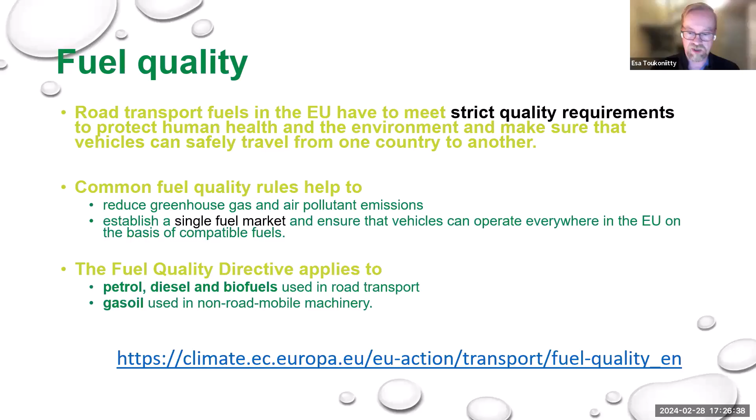If you are interested, you can take a look at this fuel quality directive. I have taken some slides which open up what the fuel quality directive specifies, but that will come later.

In this fuel quality directive, there are specifications for different fuels like petrol, diesel, and the biocomponents that have been blended into these fuels. There's a list of parameters with a set of minimum and maximum levels, and the parameter values can vary within these limits, or sometimes there is just a minimum limit, sometimes only a maximum limit, depending on the parameter.

Also, there are limits for pollutants. These are not actually in the fuel, but come from the combustion process while the engine is running, so it ends up in the exhaust gas. It's not in the fuel itself, but the origin comes from either the fuel or from engine and after-treatment system performance.

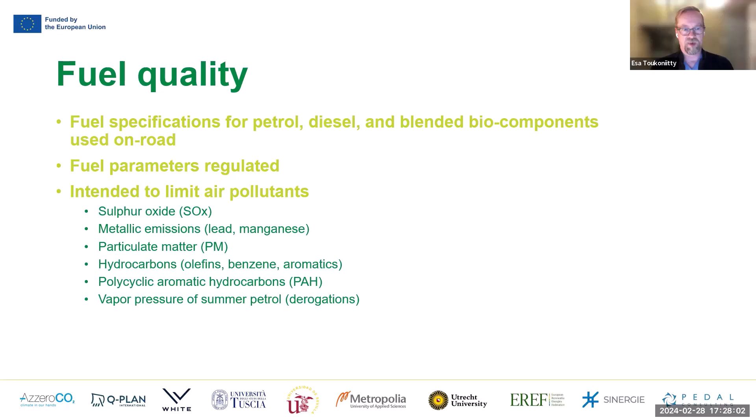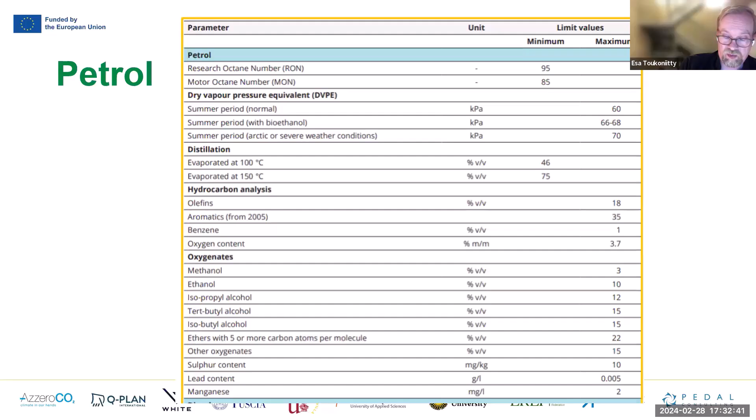I think in the aviation industry it's still being used, not in all airplanes, but at least some.

During this course, we also take a look at another biofuel which is a bit more technically advanced, the hydrogenated or HVOs - hydrotreated vegetable oils. Their performance is much better, and those can be used as such without any fossil components. But this can be added at a maximum of 7 volume% into the current fossil-based diesel that we have in today's gasolines or petrol stations.

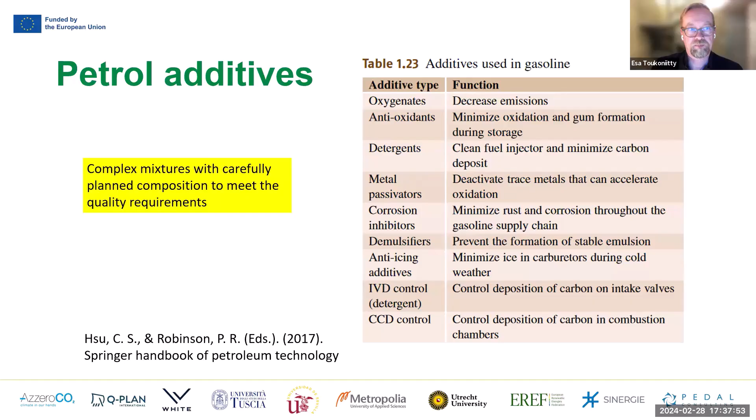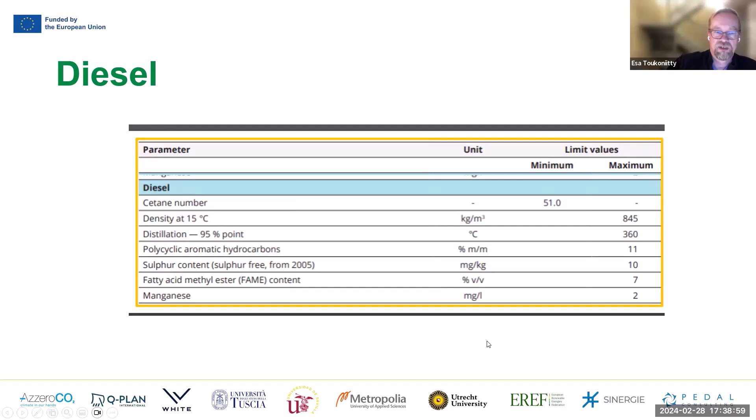There have been quite big problems with this. So therefore, if you are a sailor or if you have a diesel engine in your boat, you prefer using diesels that do not have any biocomponents blended in.

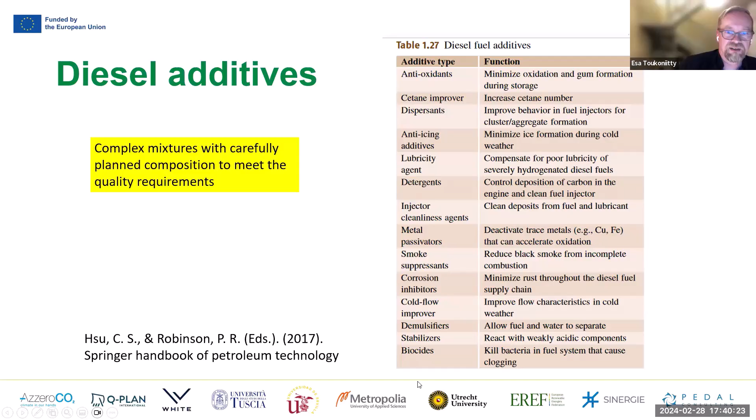Just a peculiar detail regarding this. This is the long list. There was also the EU fuel quality requirements. The fuel has to be compatible with the engine, and that's self-evident. If it's not, it will end up breaking the engine or causing problems.

That's not wanted. Also, the after-treatment units have to tolerate the fuels and the components in the fuel. This whole system is kind of interconnected - the type of fuel has been fixed and set in these standards and rules, and the engines have been designed to operate in an optimum way with these current fuels.

The after-treatment comes from the fact that emissions are controlled, and if car manufacturers want to meet the emission limits, they cannot do it by just optimizing the engine or selecting the fuel, but they also need to do after-treatment for the exhaust gases. Therefore this is kind of a marriage of three components that have to work together.

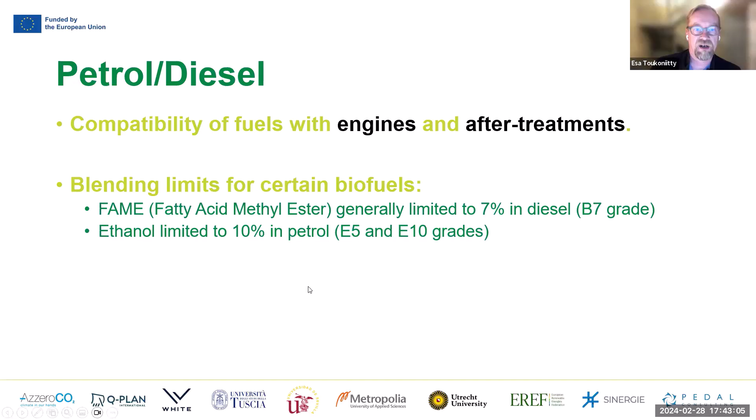FAME is used in diesel, like mentioned already multiple times, but currently bioethanol is used in petrol. At least in Finland, we sell 98 octane, which has E5, so 5% ethanol, and then we have 95 octane that contains a maximum of 10% ethanol as the biocomponent. This comes from the fuel directive and from the standards as well.

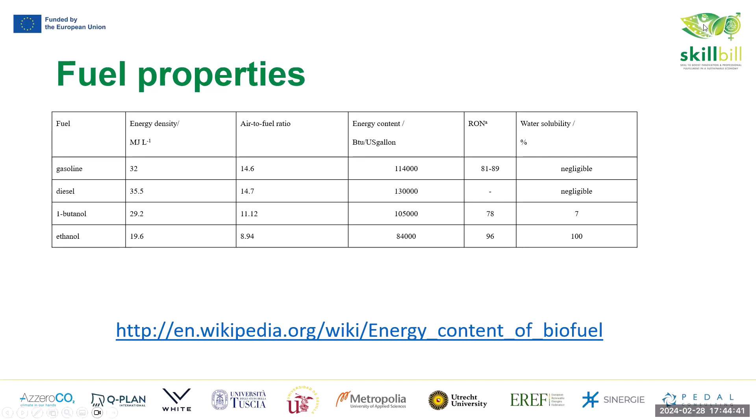So what I wanted from this table is important properties - water solubility. We know that traditional fossil-based gasoline or petrol and diesel are not water soluble. That's a good property - if you have water impurities in your fuel, those will separate as their own phase, a water phase, usually at the bottom of the fuel tank. But water will cause problems in the engine and in combustion.

When we add biocomponents like ethanol, which is an alcohol product, you can mix it in all proportions - it's completely water soluble. So it will absorb moisture from the air, and the water content will gradually rise, causing problems eventually. Butanol is a slightly longer chain alcohol than ethanol and is only slightly water soluble, but this also applies to FAME, the fatty acid methyl ester biodiesel component. It's slightly water soluble, and some stability problems and microbial growth problems come from the water solubility of that particular chemical.

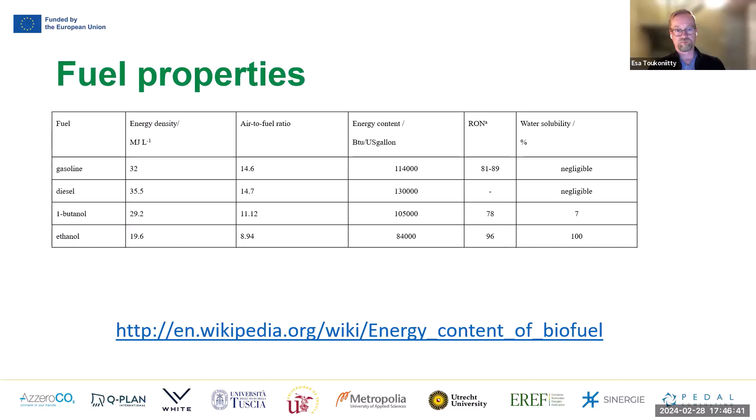I will not tell you much about these. It was just to highlight some of the things that are important, perhaps also important for the optimal performance of the engine, and are related to the fuel itself.

So for each fuel there is a certain air to fuel ratio, which is kind of the stoichiometric amount of oxygen needed to combust the fuel completely. The engine can be run with an excess of oxygen, or with too little so that there is not enough oxygen. So you can vary the amount of air compared to the fuel, and this air to fuel ratio is a measure of that.

This has particular importance for the after-treatment catalytic converter. If there is excess of oxygen, you run in oxidizing conditions. If there is a lack of oxygen, you run under reducing conditions. A few words about that soon.

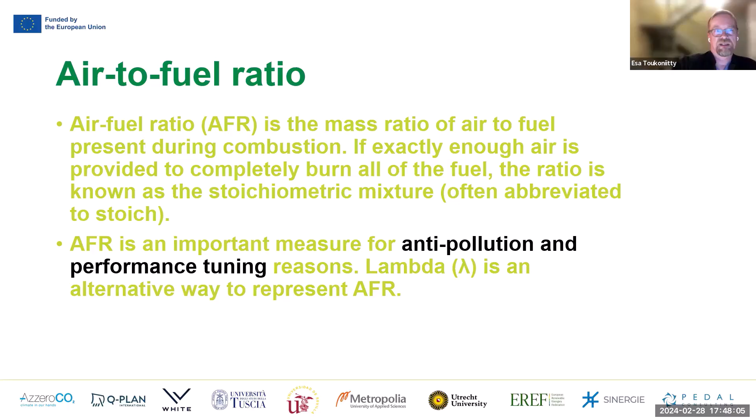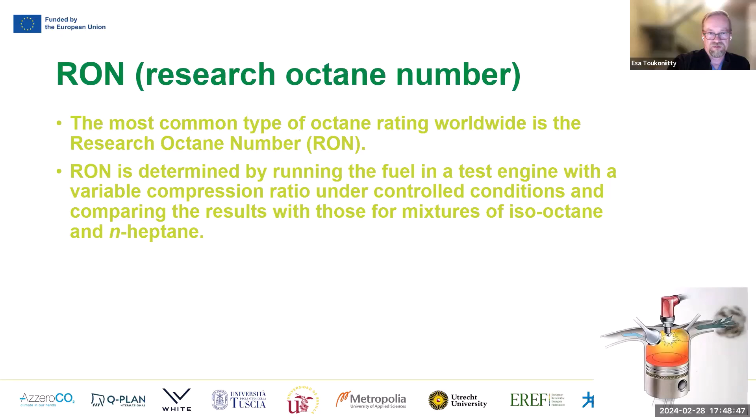This was also mentioned, the octane rating or octane number. It's a property that describes something about how the fuel will burn in the engine. The research octane number is often connected to petrol or gasoline, and the cetane number is connected to diesel fuels. This is also related to the difference between these two engines. Of course, you can determine both numbers for a single fuel.

Octane number basically is related to a standard mixture of isooctane and heptane, and how it performs in the engine compared to the actual fuel.

For example, in Finland we currently sell two types of petrol, 95 and 98 octane. So that means 95 octane petrol is comparable to a mixture of 95% isooctane and 5% heptane.

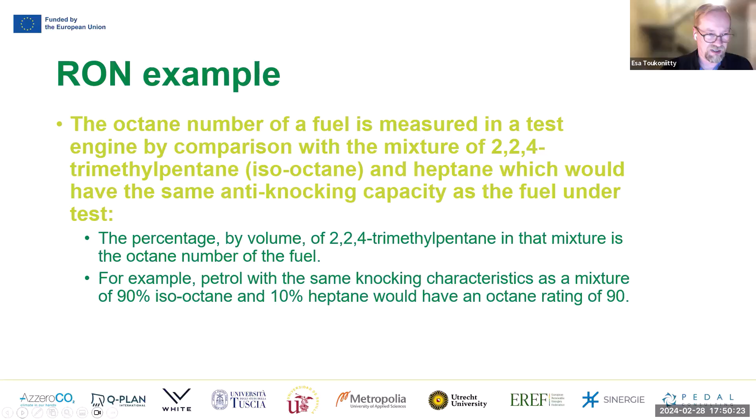And this can be measured in a laboratory test bed, how the unknown biofuel, or the fuel that we want to determine, performs to get the octane rating of that particular fuel. I don't know if I'm making sense with this, but hopefully.

Cetane number is important for diesel fuels, and the higher the number, usually the more expensive, and one could say better the diesel fuel is.

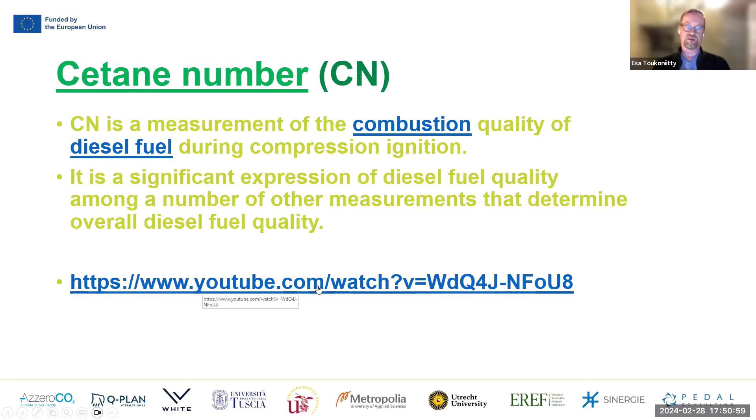I will not go into details, but on your own time you can watch, for example, a YouTube video that explains what the cetane number is about. It tells something about the ignition delay, but I will not go into details with this.

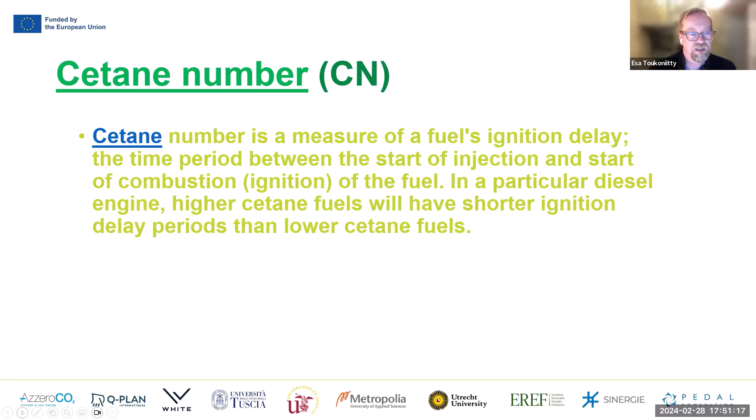Already 20 years ago, when I started research in this biofuel field, it became clear there was already talk that we should develop standardized biofuels or standards for particular biofuels in order for those to be commercially usable. And that same is true still today.

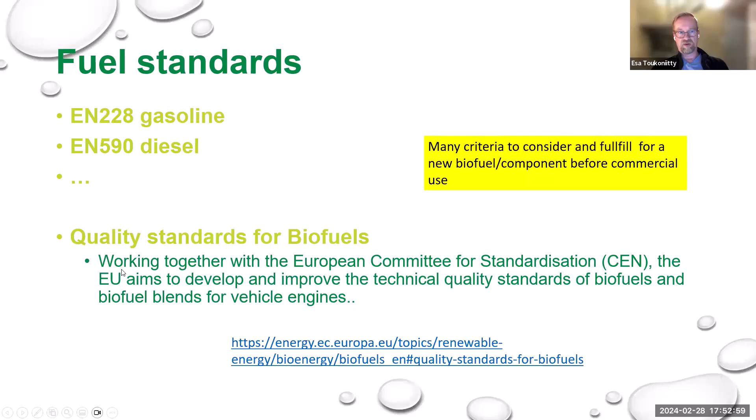This is just copy paste from the EU's web page, where they claim they are committed to developing these biofuel standards. Say something about the emissions, and...

HC refers to hydrocarbons, so that is the unburned fuel components. CO, carbon monoxide, comes from incomplete combustion, so it's only partially combusted or oxidized carbon. Particulate matter are tiny soot or carbon particles that come from the combustion process.

Nitrogen monoxide and nitrogen dioxide tend to form, and you cannot avoid those very easily because the oxygen comes from air, and air contains nitrogen as such. So this nitrogen doesn't have to come from nitrogen-containing components in the fuel, it comes also from the nitrogen in the air. And then completely oxidized carbon dioxide is also formed, plus water vapor and some minor components.

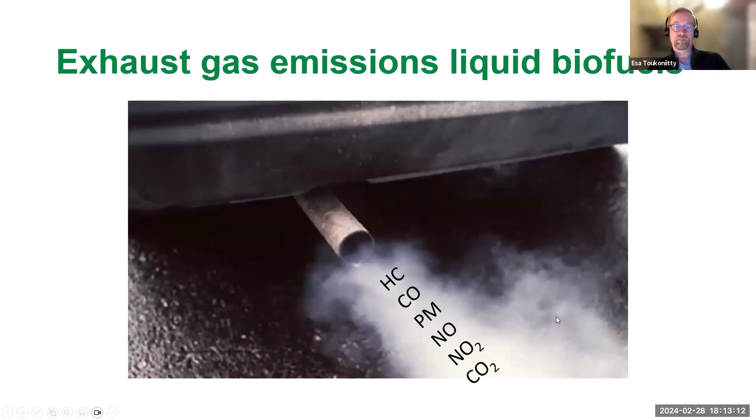In Europe, these emission limits and standards are called Euro standards, starting from Euro 1 until Euro 6, which is currently the standard for passenger and diesel cars, I think. This applies, of course, to new cars coming out from the manufacturer. You can still run old cars, but the new standards apply to those that are newly manufactured.

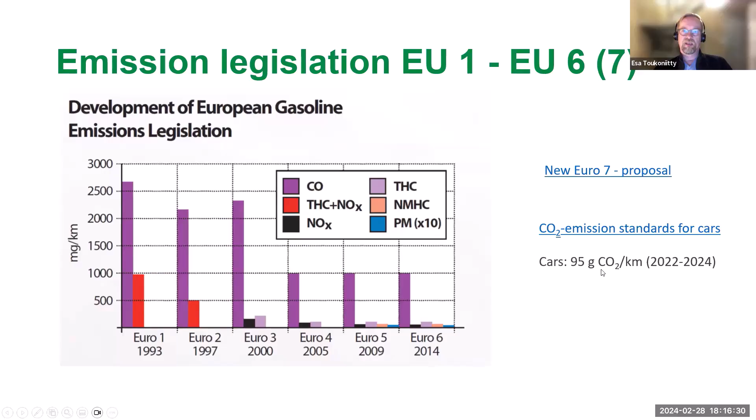Nowadays there are also carbon dioxide emission limits for cars being manufactured. This isn't really visible from this particular graph, but the way these standards are met involves several technical details and things that can be done.

If that's usually not enough, you can implement so-called after-treatment equipment - I'll show you soon some examples of those. More commonly, though, you apply many things together in order to reach the desired outcome in exhaust or emission reduction. So it's a combination of various things, not just these two separately, but modifications and other measures all together.

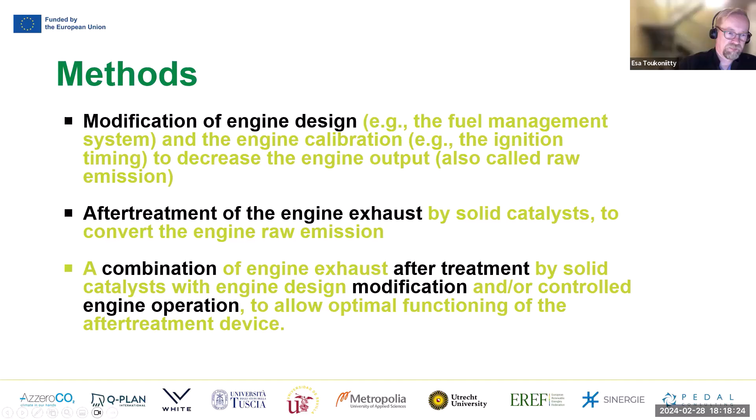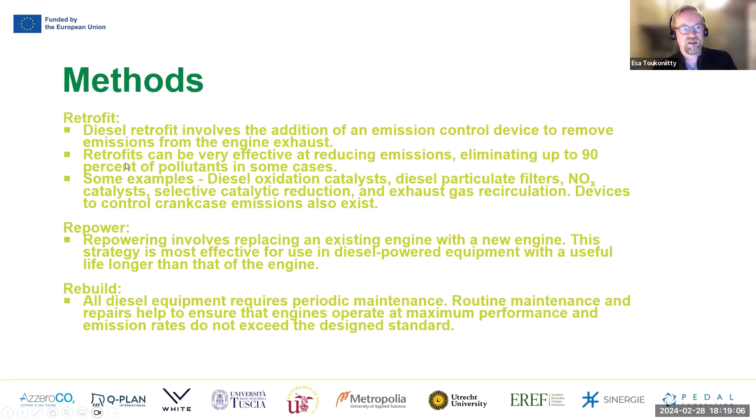These are maybe not that relevant to passenger cars, but in principle, for some larger vehicles, you might do retrofitting. You can repower something by basically changing or replacing the engine. That's of course not really relevant for regular passenger cars, but if you have something bigger, like excavators or other units, this could make sense.

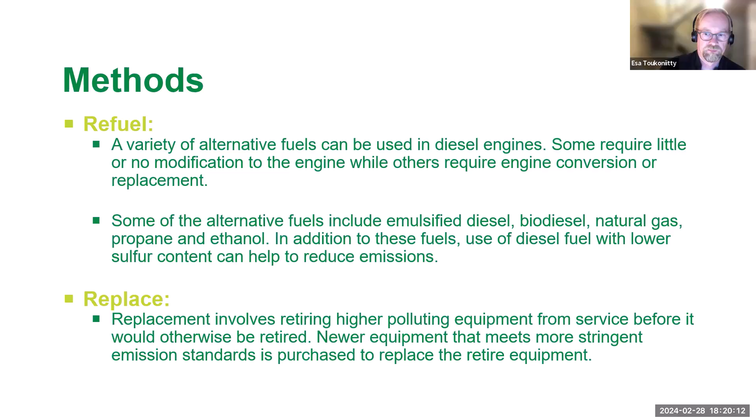You can also comply or try to reduce emissions by using alternative or different fuels. So you can refuel your vehicle - at least, I don't know about the countries you come from, but in Finland, if you have gasoline-driven vehicles, you can modify them slightly so that instead of running on gasoline or petroleum, they run on, for example, ethanol, like an 85% ethanol, 15% gasoline mixture. These are some of the ways you can try to reduce your car's emissions.

The chemistry behind this involves two factors: thermodynamics and how fast equilibrium is obtained. Basically, if you have pollutants forming or remaining after combustion, such as unburnt fuel, in principle the equilibrium would result in carbon dioxide and water. The same applies for carbon monoxide, which would be converted to CO2, and also nitrogen-containing oxides would thermodynamically convert to N2 or nitrogen, and so on. CO2 will be just CO2 based on thermodynamic arguments. So basically, if we allowed enough time for the engine and exhaust gas system, these pollutants would probably in 10,000 years or a million years convert to these unharmful components, but that's of course not acceptable.

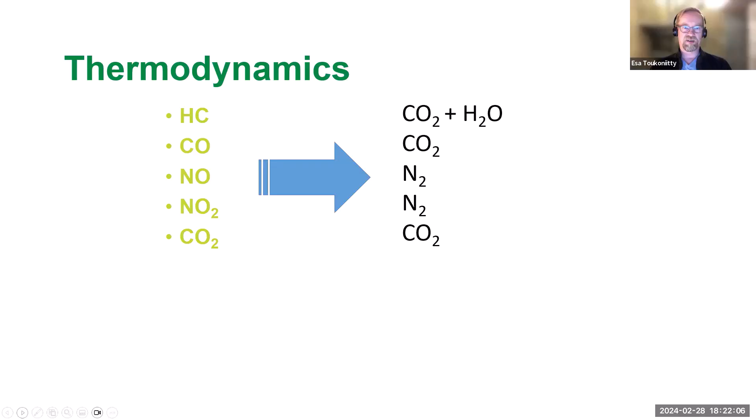So if we want to speed up the process, we use catalytic materials. The catalytic materials make the reactions approach equilibrium faster.

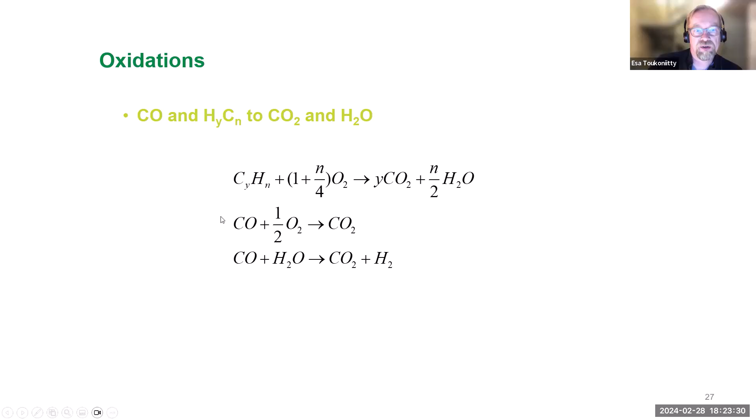I think none of you had a chemistry background, but in any case, here are the two reactions. Combustion is generally called an oxidation reaction, and here are some reaction equations for it. CH is hydrocarbon - it combines with a stoichiometric amount of oxygen, and you get carbon dioxide from each carbon atom, and a water molecule from two hydrogen atoms. That's complete combustion. If there's incomplete combustion, you tend to get carbon monoxide and water, along with some other reactions as well, but we will not go into this now.

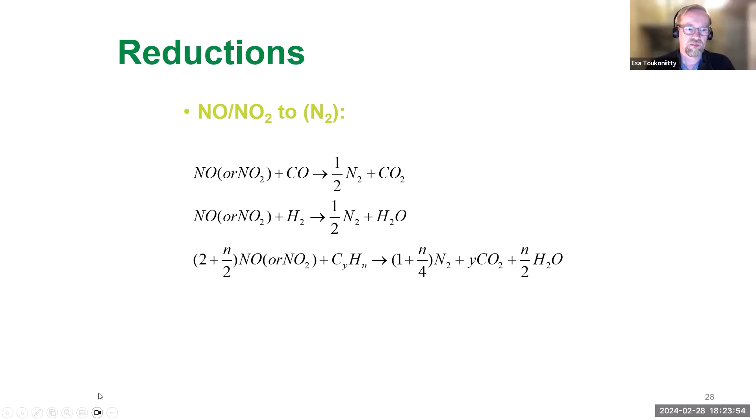The other thing that can happen is a reduction reaction, which is opposite to oxidation. So if something oxidizes, if you reduce it, it goes the other direction. But what I said about the speed of this transition towards equilibrium - the catalysts can help. If you apply a catalytic material, the reactions can happen faster. So to put it in a very simplified way...

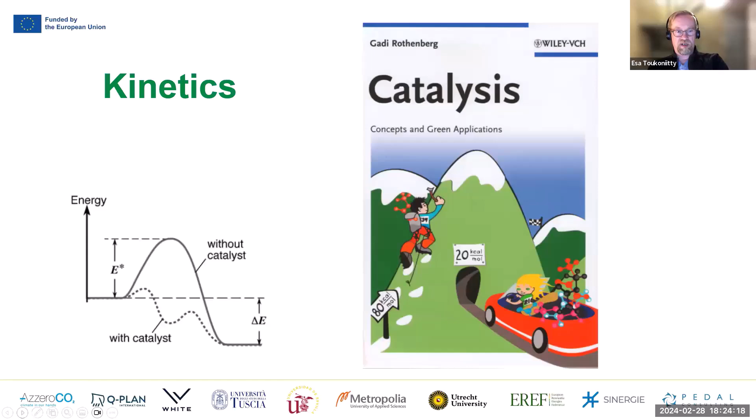In exhaust gas after-treatment, or catalytic converters, noble metals are often the most catalytically active. If we are interested in oxidizing partially oxidized components, palladium and platinum are often the best catalytic materials, and you can find them in oxidation catalysts.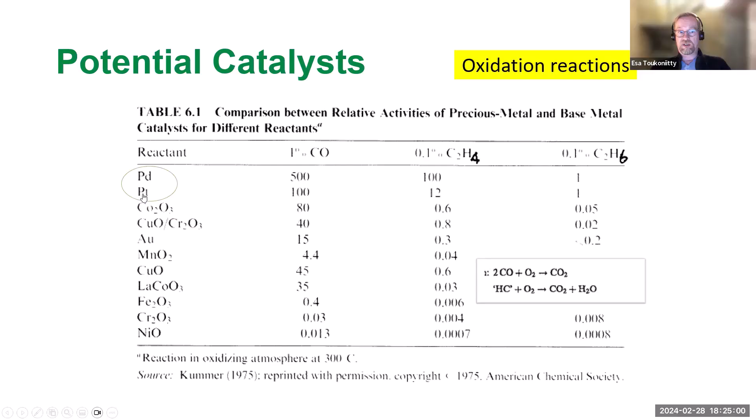If you need to do reduction reactions, as I showed you, to convert nitrogen monoxide or nitrogen dioxide into N2 nitrogen, you need to reduce it, and rhodium would perhaps be the best catalytic metal to do that.

Palladium, platinum, rhodium - these are noble metals which are very expensive, some of them much more expensive than gold. So it's problematic in that sense that one would not want to use too much of it. I will not go into catalyst design very much, but keep in mind that these catalytic converters in cars contain small amounts of valuable metals. In Finland, it's sufficient that quite many catalytic converters have been stolen from old cars, because old cars used to have a higher amount of these noble metals. The technology was not as developed, so it's worthwhile to steal them - maybe you can get a few hundred euros from one catalytic converter.

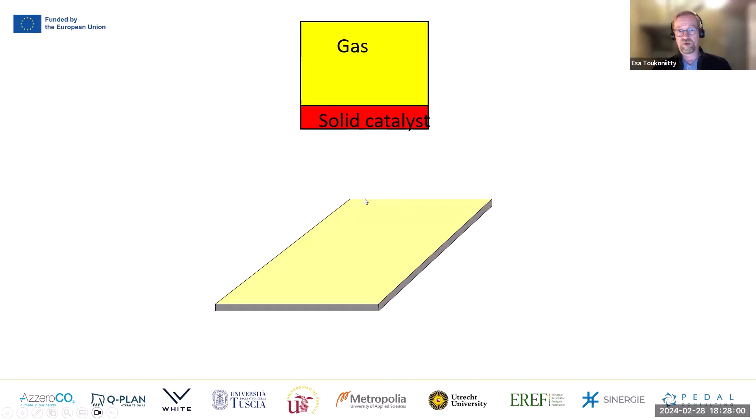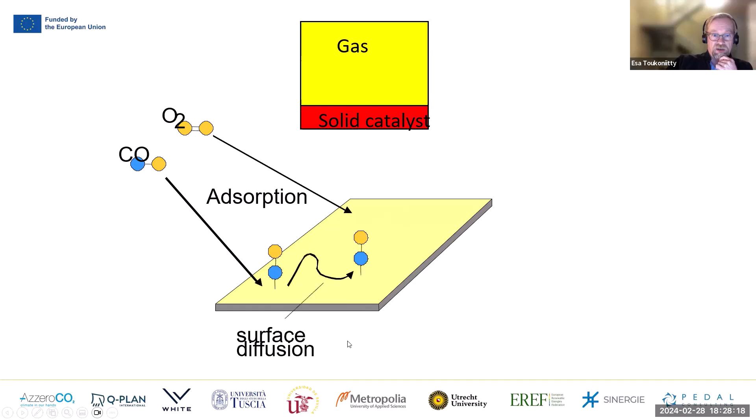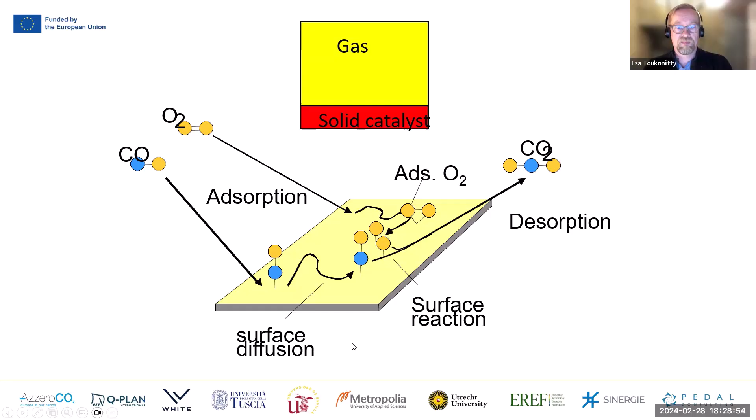But in car exhaust catalytic converters, the catalytic material is solid metal particles, and they react with the gaseous feed of exhaust gas - it happens on the surface of that metal particle. This illustrates the phenomenon where the pollutant will stick on the surface of the catalytic metal. Other components will also stick there. There might be some diffusion happening on the surface, and then reaction taking place between these adsorbed molecules or intermediates on that surface. Once the reaction takes place, the products will desorb from that surface, and this adsorption-reaction-desorption cycle happens on that particular surface. So these reactions will not take place in gas phase, but on the catalytic material.

Petrol or gasoline-driven cars usually have a so-called three-way catalytic converter. It does NOx reduction and hydrocarbon oxidation - two opposite things simultaneously, which is kind of surprising, but it works. It's like heating and cooling at the same time, two totally opposite phenomena, but those tend to happen. The rhodium metal speeds up the reduction of NO and NO2, and the platinum metal particles accelerate the oxidation of unburnt hydrocarbons and partially oxidized carbon monoxide.

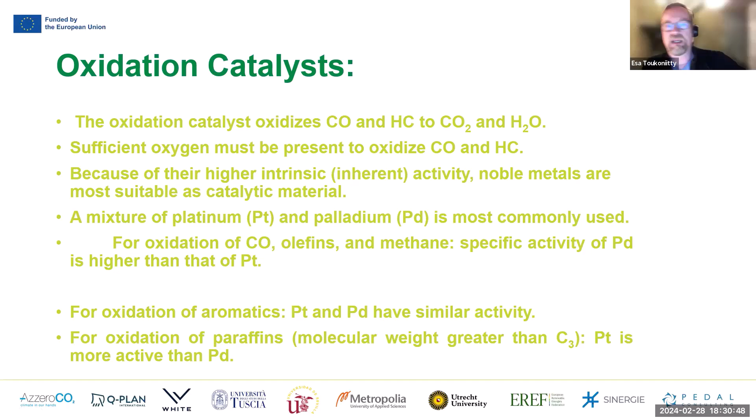I think this goes maybe a bit off topic, but for oxidation there has to be oxygen present in the exhaust gas. We'll come back to that in the coming slides. So if we run the car rich or lean, it influences how the catalytic converter will work.

But basically the untreated exhaust gas coming out from the engine runs through this catalytic converter. Those oxidation and reduction reactions take place, and then the cleaned, or at least slightly cleaned, exhaust gas exits this unit. Very simple, no moving mechanical parts.

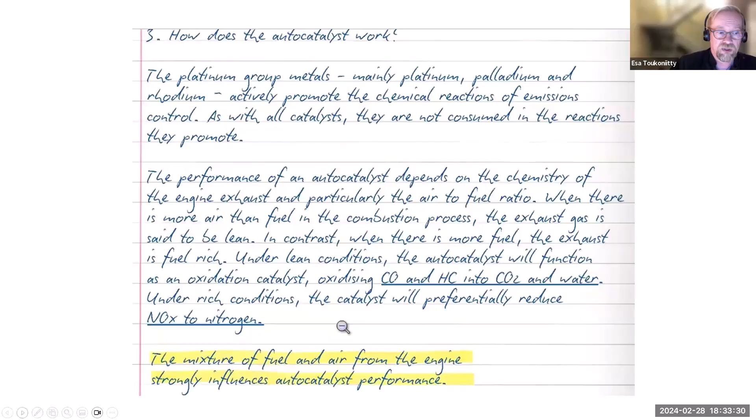Therefore there is an oxygen sensor in the system, so that if the air to fuel ratio is wrong, the engine can be changed and optimized accordingly. So it reacts to the oxygen sensor readings, and it will adjust the lambda value in that unit.

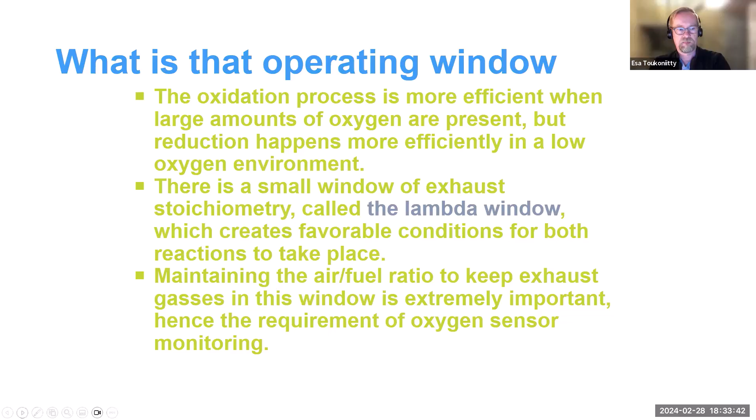So here's a very old, hand-drawn picture, but this will tell you the operating principle of that three-way catalyst, and we won't worry too much about the details. But when the lambda value is exactly 1, it means there is that stoichiometric air to fuel ratio, so that there is exactly the amount of air and fuel needed for complete combustion of that fuel.

And if there is too much oxygen, that means there is less fuel, so then you say you are running the engine lean. If there is more fuel than oxygen, then you are running rich.

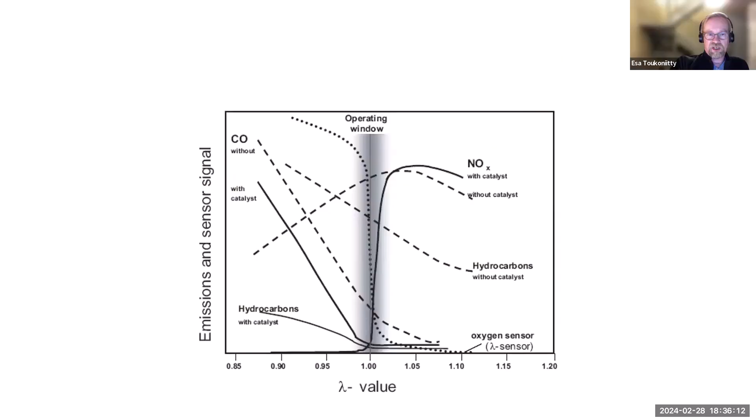So in order to maintain this optimum situation, you need that oxygen sensor and continuous control and adjustment of the air to fuel ratio. That's basically something about the operating principle, but this is linked to the fuel properties and to that mentioned parameter, air to fuel ratio. This is the same graph, or same information, just put in twice here.

Diesel vehicles would also be an interesting topic to discuss more. However, I think for gasoline-driven vehicles this three-way catalytic converter has worked quite well for a long time, fairly sufficiently. But in diesel engines there has been much more development taking place, and the development push or need comes from those tighter EU emission standards, or tightening emission standards.

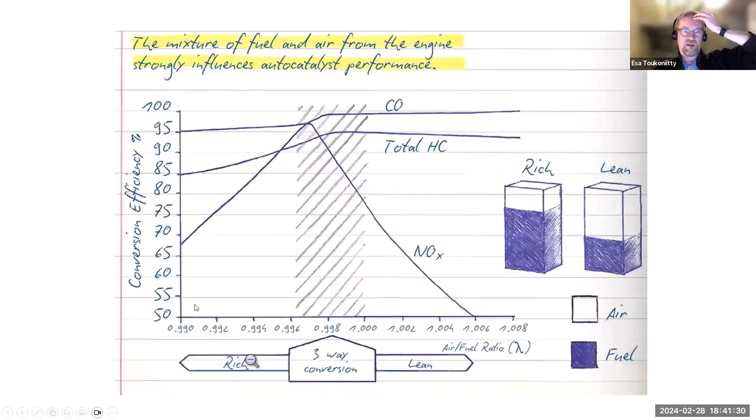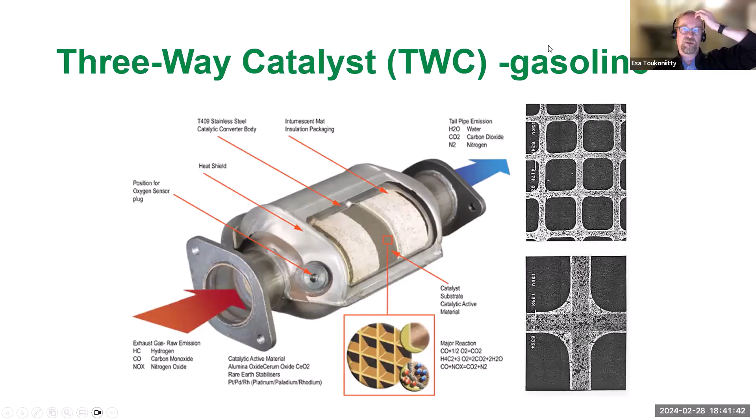But that's just about these different alternatives. In summary, for gasoline, if you run with 95 or 98 octane gasoline, you most probably have this three-way catalytic converter in your car. But if you have a diesel passenger car, you have some of these setups as the after-treatment units. I think this exhaust gas EGR technology has been in cars for some 15 years roughly. If you have a less than 10-year-old car, you probably already have this urea technology implemented.

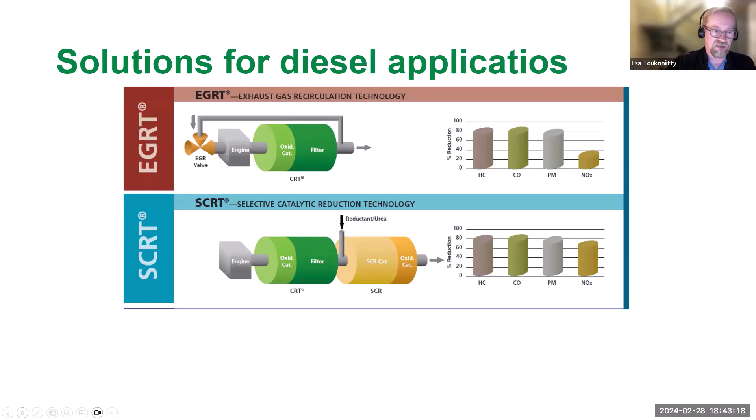In order to make things work, the last point related to these emissions is that there are a lot of catalytic materials in the exhaust gas system. Here, for example, are oxidation catalyst, reduction catalyst, and oxidation catalyst. Typically, these catalytic materials can be very sensitive to poisons. The poison is something that, through different mechanisms, can adsorb very strongly on that catalytic metal and never leave, gradually blocking the whole catalytic material and killing the catalyst. That's called catalyst deactivation, or one form of it.

Some chemicals, elements, and metals are very potent poisons. You need to take that into account when you design the whole system - the engine, the lubricants, and the fuels - so that they would not introduce these catalyst poisons. This adds an extra level again to the fuel design, the engine design, and also the additives that you put in your fuel.

Sulfur, manganese, lead, and also some halides can be quite potent poisons. In lubrication oils, previously you might have had phosphorus and sulfur, for example - those are commonly known catalytic poisons. Also, you might end up with some tiny metal particles from engine wear, which might also cause catalyst deactivation.

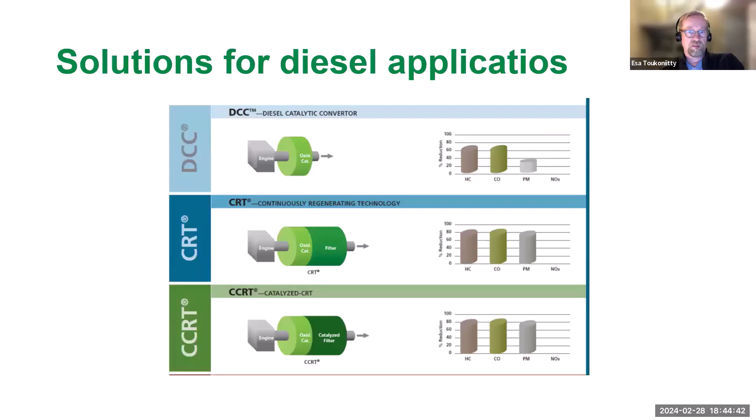So this whole emission control versus fuel quality, also environmental concerns, requires quite multidimensional and complex solutions. In that sense, it's quite understandable that there are these rules, standards, and recommendations regarding fuel composition. The standards in particular help car manufacturers, engine manufacturers, fuel manufacturers, and lubricant manufacturers make products that work well in current cars. So it's maybe not such a stupid idea to have fairly strict and detailed requirements for fuels and related things.

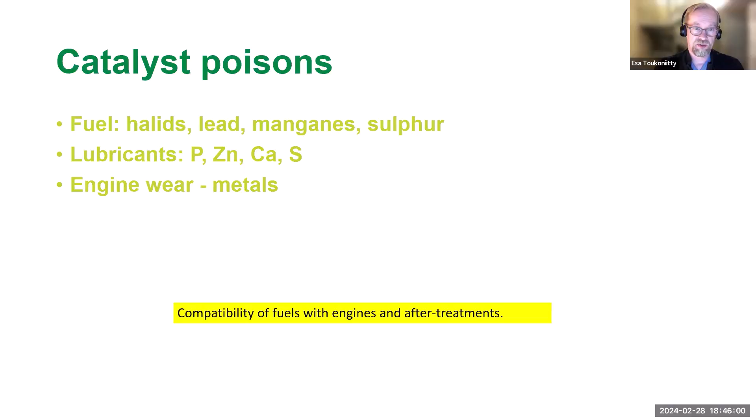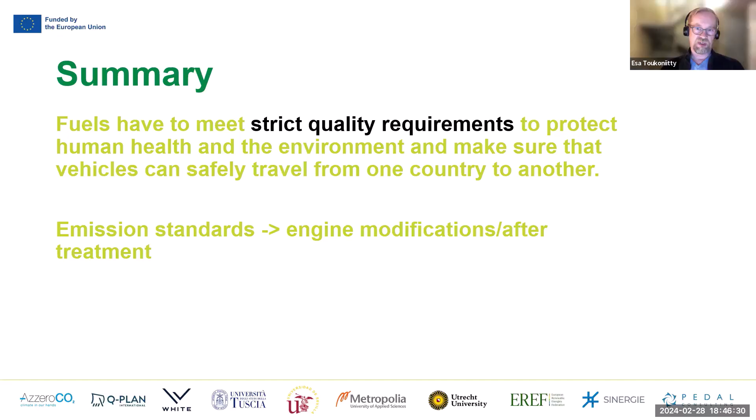But that was this part regarding the emissions. In summary, the current environmental or emission levels are so low that they can only be met in current vehicles by having proper fuels, optimized engines, and also quite sophisticated exhaust gas after-treatment equipment, all working together.